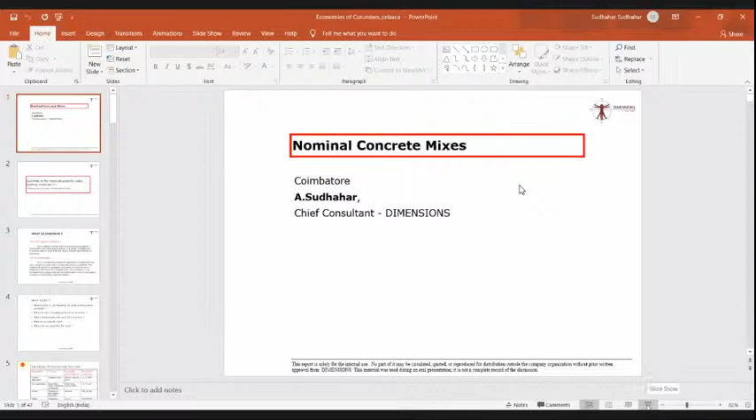I must appreciate your enthusiasm to participate and learn. That should be the spirit of a future civil engineer, to win in this competitive world.

I would like to mention a few words about Dr. Sudhahar. He started his career as a faculty and then shifted to consulting, and later joined ACC Limited, a leading cement manufacturing company in the country. He started as a sales manager and grew to become technical head of the Southern region of India. Then he left ACC and started his own consulting firm named Dimensions. Until date, he is successfully rendering structural engineering and other services. He is also a past secretary of the Association of Consulting Civil Engineers Coimbatore Center.

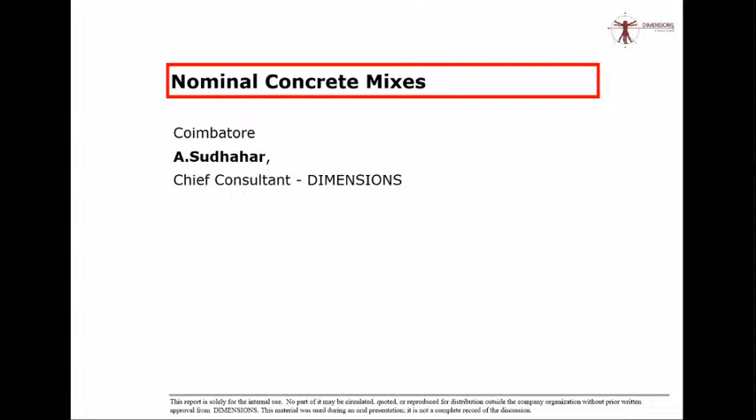And as we see this statement, we should also be looking at it through the perspective that tomorrow's concrete is mostly to be used volume-wise. It is to be used in housing projects, which would normally use M20 grade and below. So to understand nominal mixes becomes very, very vital.

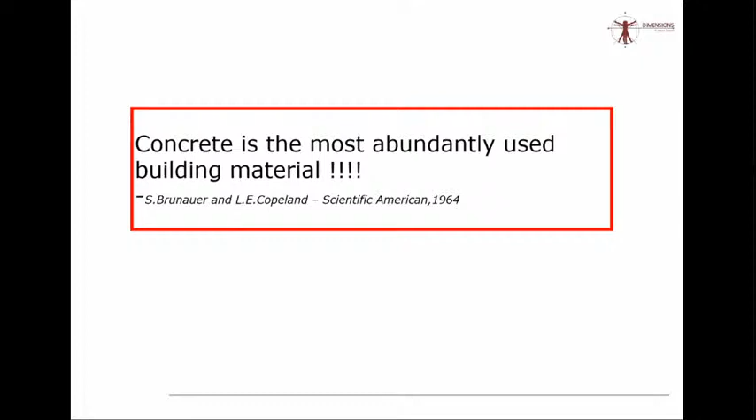Coming to the definitions, I have two definitions here on what is concrete. Most of you would have an academic definition, probably if you have already taken the course on concrete technology. They would describe concrete as a mixture of binder, fine aggregate, coarse aggregate with water. For an actual definition, I would say it is a building material which is generally strong against compression and weak against tension. It is plastic, workable, and moldable when in a fresh state, and it attains strength and stiffness on hardening.

So this definition is more or less giving you a picture of why concrete is being used, because it is very, very strong in compression. It is moldable into any form. It is more durable than most of the other building materials. So concrete is a very popular building material.

To us, which could probably be you or me, it is a homogeneous mixture of aggregates. Here comes your academic definition: it is a homogeneous mixture of coarse and fine aggregates, with a binder and water. It may or may not have additives, but nowadays almost all concretes involve the usage of some admixture or additive, because we expect more out of concrete.

And the quantity of the ingredients are based on the requirements of the behavior of fresh concrete and the hardened concrete, which means what I would use and how much I would use depends on how I will use it and for what purpose, or the engineering requirement of the concrete in a hardened state, namely the strength part, the control on crack width, etc.

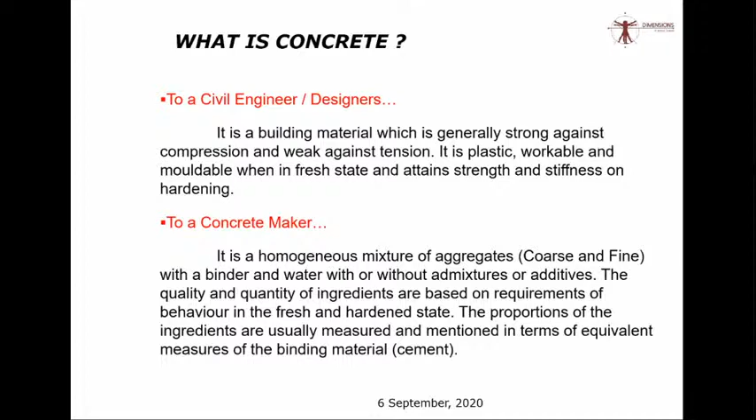So today we also have to look at a very important perspective of concrete, which is cost. Our books don't talk much about cost, but in a practical sense, not only concrete but any building material, any engineering material for that matter, qualifies to be used basically because it satisfies the engineering parameters in terms of strength. Strength can be in terms of compressive strength, tensile strength, abrasion resistance, impact resistance, tenacity, ductility, etc.

So it is all about the engineering parameters. One side is the strength. The second major factor for any material, not just concrete, is the availability, the ease with which one can avail that material and use it to form a product. Third would be formability or usability - how easy is the material, and most importantly, at what cost? Because today's market is all based on cost.

Like any product that is developed and sold in the market at some cost, if this cost is feasible, if this feasibility is defined properly, then the product comes into use. For example, you get a concrete which is highly durable - say somebody claims it will not even crack for 200 years. We are all happy. It is highly strong, you are happy. But if it costs you a bomb, if they say per cubic meter I would charge you 1 crore...

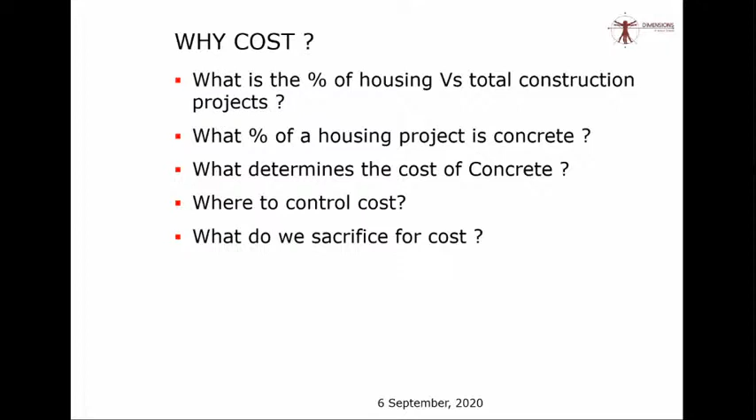So we should not compromise on quality for cost, though cost is of course important. Now, this table gives you the various possible ingredients in concrete, starting from coarse aggregate, which is the major part of concrete in terms of volume. Then comes fine aggregate - these two are bound together by a binder, cement being the most popular binder nowadays, though there are other forms like lime concrete or bituminous concrete. So there can be any form of binder. It has water - when cement or lime is used, we use water; for bituminous concrete, admixtures are used. Each of these ingredients has its own function in the concrete matrix.

Namely, the coarse aggregate is the primary filler - it offers density and the majority of the dead weight required for concrete. Fine aggregate fills the voids between the coarse aggregate, therefore it's called the secondary filler. It also influences workability - that doesn't mean coarse aggregate won't influence workability, I'll touch upon this point shortly. So coarse aggregate and fine aggregate combinedly influence workability with respect to their shape, particle size distribution, texture, etc.

Then comes the binder. The primary job of a binder is like a glue - it binds together all the particles of the concrete. It also ensures durability, blocking the finer pores or voids within the fine aggregate or the whole matrix. The density of this blockage determines the durability to a great extent.

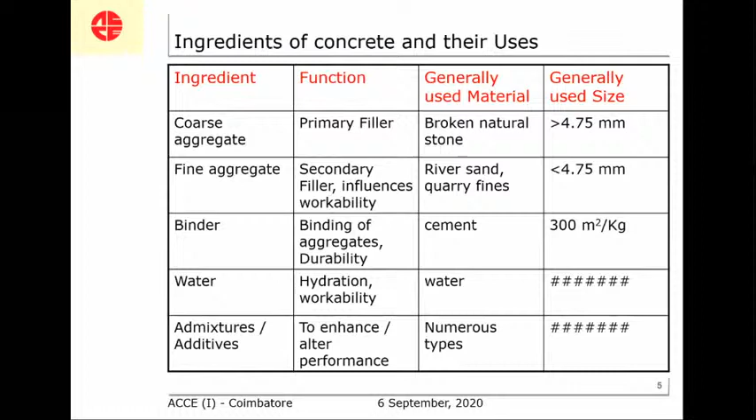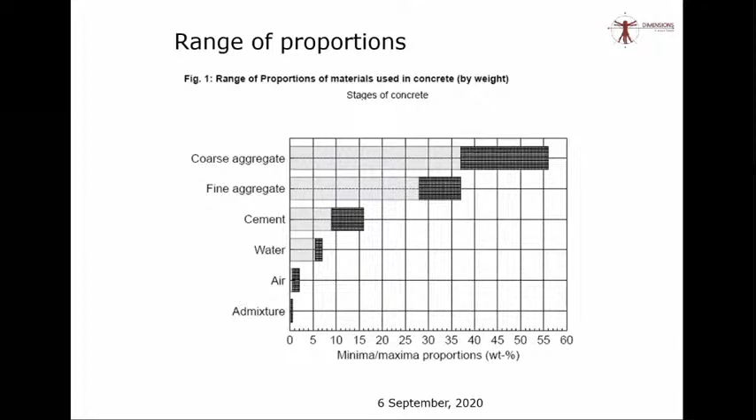Then water to cement is always in the range of 0.5 to 0.55 - almost 50% of water would be required based on the quantity of cement you use. You should also appreciate that there is some air content. You cannot make a zero air content concrete - at least till now nobody has produced it. You have various degrees of admixtures, but their influence on the rheology is going to be great.

Okay, coming to the performance of concrete, we have to view concrete in three different stages. One is the fresh stage, the other is the hardened stage - these two are very popular. Transition stage is one stage which as a student you may not have had a very good experience with, or may not have interacted with concrete in a transition stage.

In the first stage, we all would have done the slump cone test, so you know how fresh concrete looks like and how to do the slump cone test, where the most important parameter viewed for concrete is the workability. In the hardened stage, the most important parameter is mostly the compressive strength. In some special structures, we also look at the tensile strength of concrete, the crack pattern, the crack width, etc. But coming to this transition stage, what is this transition stage?

It is a stage in which the initial setting of concrete is over, but it has not attained the final strength, or it has just started the process of attaining final strength. So initial set is over, hardening has just started. This is the stage called transition, sometimes called young concrete, or colloquially, this is the stage where concreting is done, finishing is done, and it is just time for you to start curing the concrete. It is the time just before curing. This is called a transition stage.

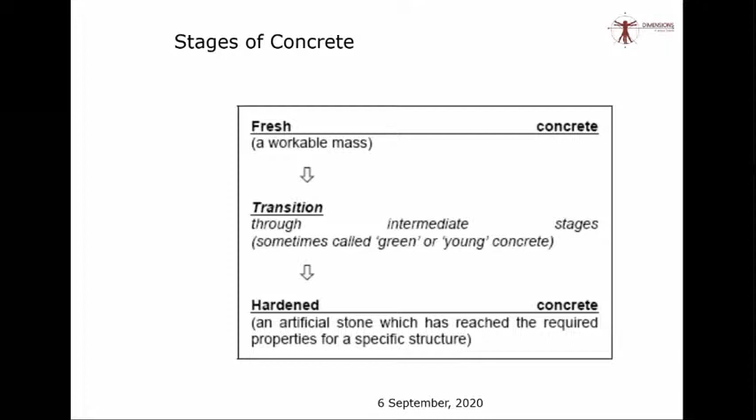This stage is very important for you to engineer, to supervise, to take care of, because this stage will ensure the right performance of concrete. It will also ensure a longer durability for the concrete.

How do we understand concrete? We were discussing this just a short time before. How do we understand this concrete? It is workability, strength, and durability, but the most popular parameter is strength. We only talk about grade of concrete. We are aware of workability, but the awareness dies after the concrete pouring is done. Though workability is a very significant indicator of the final performance of concrete also.

For those of you who would go to sites and would be using this concrete, remember, workability is an indicator. If you have very high workability, you should start thinking more about what is happening inside this concrete. If you have very low workability, you should start thinking. So workability, though it is a parameter that you assess once you place the concrete, vibrate it and finish it, is an indicator of what has gone inside the concrete. And you can almost predict what will happen to the concrete after it is hardened completely.

Then comes the strength. The predominantly used strength parameter is the compressive strength. There are research topics, applications, and tender documents which also emphasize the requirements of tensile strength. But concrete, we know, is primarily used to the advantage of its compressive strength.

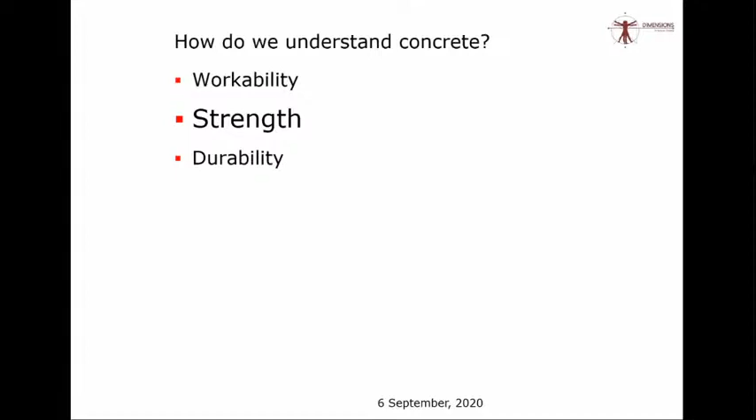There are tests which will tell you the level of durability. It will not give you an absolute value. Tests like permeability test, chloride penetration test, sorptivity test—all these are tests for durability of concrete, but they will only give you a relative value of the durability performance. It will not give you an absolute value of durability in terms of timelines.

Now come to the strength. We usually classify concrete in terms of grade of concrete, starting basically from M5, M7.5, M10, etc. This grade is called the characteristic strength of concrete. If you search your code book for the definition of characteristic strength, your IS 456 will state that it is the strength of a material below which not more than 5% of the test results are expected to fall.

Which means if the strength is 95% okay, then it can be assigned that strength. To be very precise, if you test 100 samples of a particular material—it can be concrete or anything else—and out of those 100 samples, if 95 and above pertain to a value and above—see, for example, in concrete, if 95 cubes of samples out of 100 cubes which you take exhibit strength of 30 MPa and more, then you can grade that M30 concrete, which means 5 cubes can be below 30 also. So it is only 5% tolerance which the code book is giving.

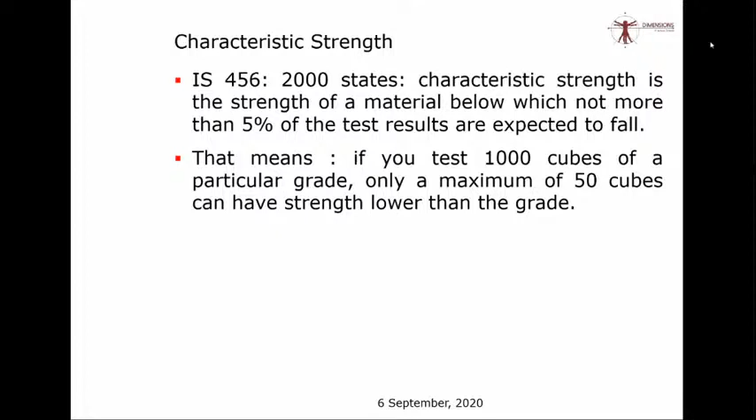That is why the earlier tests, not the grade test but the other tests done on concrete, are all in forms of 7 days. You either test it on the 7th day, 14th day, 21st day, or the 28th day. So if you are casting something on a Monday, remember you will test it on the next Monday, the next Monday, the next Monday, or finally the 4th Monday, which is the 28th day, and that will give you the concrete grade itself. That is it with the characteristic strength.

Now coming to the ingredients one by one. Basically, there are two popular forms of binders available in cement itself. One is ordinary Portland cement, and the other is blended cement. Out of the blended cements, the most popular one is Portland Pozzolana cement. The second popular form is PSC, Portland slag cement.

Now, what happens when OPC combines with water? It forms something called calcium silicate hydrate gel, CSH gel, and it also forms lime, calcium hydroxide. This calcium hydroxide is very much essential for the concrete because it ensures that the concrete stays alkaline. It also plays a vital role in blocking the finer pores of the concrete matrix.

But what happens if you use more water cement ratio? This calcium hydroxide gets washed away or carried out of the concrete matrix while you cure the concrete, and that is why you would have noticed some white efflorescence or white substance coming out of concrete when you start curing it. This is nothing but the calcium hydroxide washed away due to the excess water cement ratio used during the preparation of the concrete.

But this problem is mitigated to a certain extent when you use blended cements, because part of this calcium hydroxide, not entirely, is reutilized by silica available in the form of mineral admixtures, basically the pozzolana materials, the fly ash or the slag. So part of this lime is again combined with silica, and it again forms a small quantity of calcium silicate hydrate. This is why blended cements are more durable, as well as give a little extra strength in the long term, because of the secondary hydration which takes place.

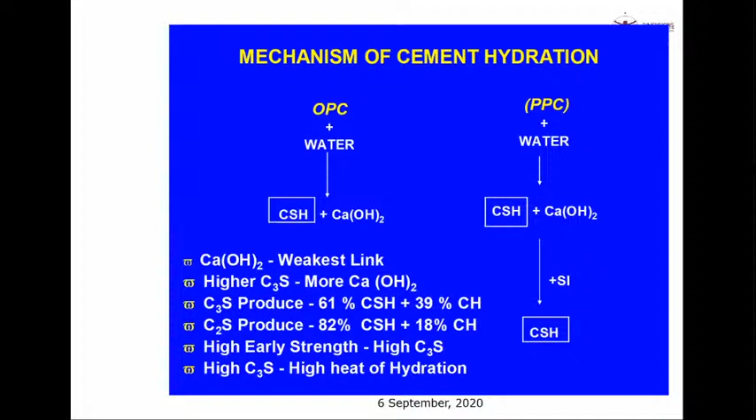These are the Bogue compounds basically available inside cement: C3A, C3S, C4AF, and C2S. I would not dwell more into this because we are going to talk more about the proportioning rather than the quality control of the concrete itself.

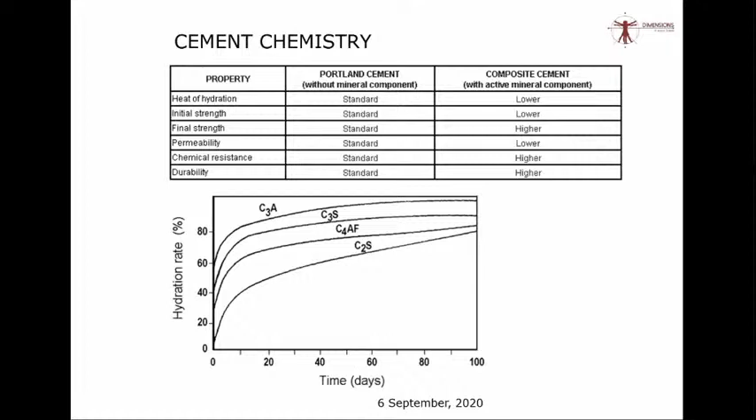But what you can understand from this is all these four compounds do not behave in a similar manner. They have a sequence of reactions. They have their different intensity of reactions, and they produce different kinds of effects while they react. So each of these Bogue compounds has a specific role to play in the hydration process. That is what you need to understand.

So I hope we have dwelt enough on grade. We just saw what is the characteristic strength, workability - the easiness with which you can transport, place, and mold the concrete, which is popularly understood by the slump cone test. There are other tests for workability also, you might be knowing. And durability is an indicative estimation of the service life of the concrete structure, but it is a highly complex thing to derive exactly. You cannot do that. It's almost impossible because it's a function of various other parameters such as exposure conditions, etc. Coming to exposure conditions, your IS 456 gives you a lot of classification on the exposure conditions. I'll show that table also now.

Water cement ratio, we understood what is Abrams' law. One basic moral which we should never forget is higher water cement ratio means lower strength and lower durability.

Curing is an important process in which you ensure that the water cement ratio which you have added during the preparation of concrete is very effective. Which means curing is not a process of adding more water. Curing is some technology. It need not even involve water. You can do curing without water also. So there are curing compounds, which is basically the protection of the water cement ratio, ensuring that the water cement ratio what you have added is fully utilized by the cement for its hydration. So that is the process of curing.

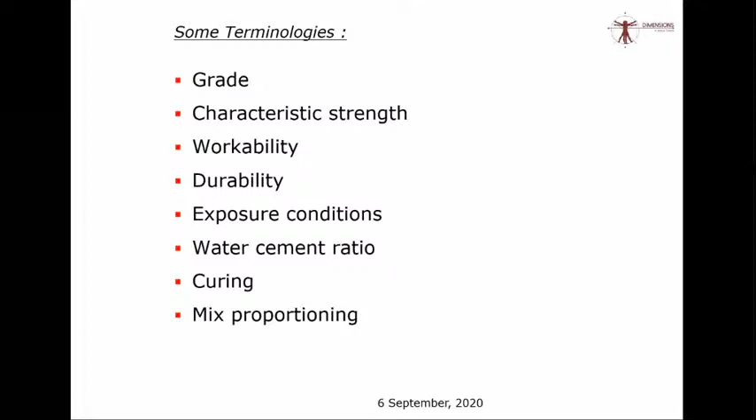And finally, we will come to mix proportioning, which is the basic language which your concrete maker will understand. You cannot go and talk to him and say I need a concrete with 60 mm slump or 75 mm slump. All you can tell him is mix 1:2:4 or 1:1.5:3, whatever. You can give some numbers through which he will understand and make the proportion.

Now, IS 456 classifies concrete into three categories. One is ordinary concrete, which is up to M20 grade. They have not put lean concrete here. Anything below M10, we classify it as lean concrete. So ordinary concrete, standard concrete, and high strength concrete. Standard is M25 to M55, and from M60 above, it is called high strength concrete. Remember, today's topic, nominal mix, is only applicable for ordinary concrete.

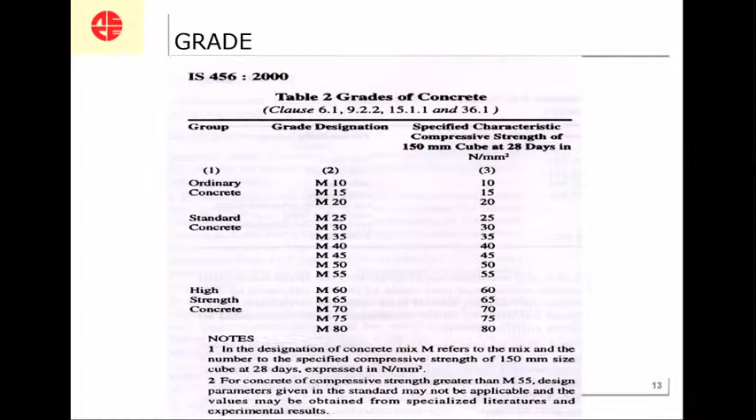These are the workability conditions, but this I would say is more or less very theoretical in nature. See, 75 to 100, for example, indicates a medium degree of workability, but sometimes on sites you will understand that 100 mm slump even causes segregation. It is highly workable, sometimes flowable also when you vibrate it. So it is all relative, all indicative. You will understand the meaning of it when you actually experience yourself with concrete. You touch concrete, you supervise concrete. The more and more you are with concrete, you will understand these numbers in a different perspective.

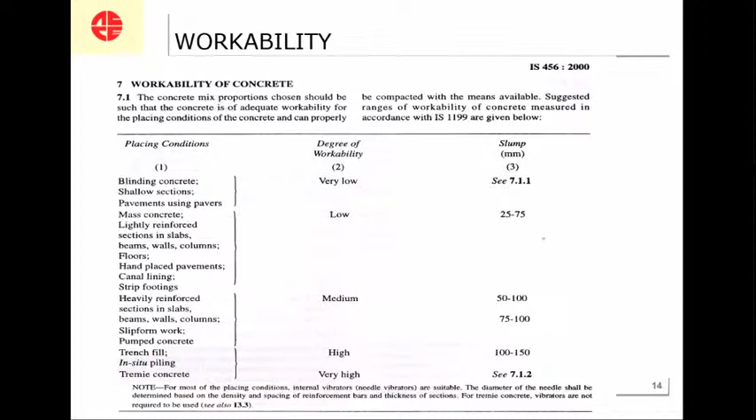Workability of concrete - I was just talking about the influence of the aggregates on the workability of concrete. In this picture, you can see two diametrically opposite forms of coarse aggregate. One is sharp and angular, the other is rounded and smooth. Common sense would say that if it is round and smooth, you will get more workability. But then what will happen is you will not have enough adherence, not enough bonding between particle to particle. So you cannot completely use smooth aggregates.

You cannot use pebbles completely as aggregates unless you have modified your mix proportion to suit that. What we have to understand is we have to find a balance between the shape, angularity, and sharpness. You cannot have very flaky or long elongated kinds of aggregates, because that will hinder your workability to a great extent, and it will force your concrete maker to add more water, and therefore you will lose the advantage of strength and durability.

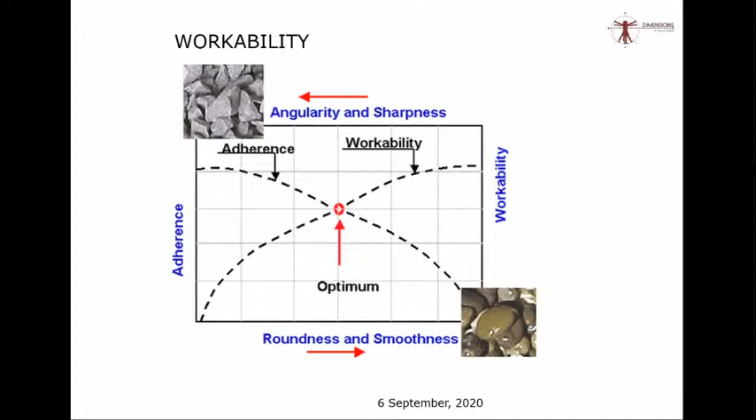Durability, I told you, is complex. It is dependent on the environment in which your concrete structure or element is going to be placed, and the cover given to the embedded steel.

The durability of concrete does not have threat only from outside, it has a threat from inside also. If the reinforcement inside is not of good quality, or if it starts corroding and swelling, then the durability of your concrete is gone. The reinforcement is protected by properly giving proper cover thickness.

Therefore, the kind of tolerance you maintain while giving cover thickness is important. The quality of concrete in the cover is also very important. I've seen many sites where the cover thickness is okay, but the cover concrete is all honeycomb, not having the cover thickness at all.

So the quality of cover concrete, the actual cover given, the type and quality of the constituent materials, the ratio used, the workmanship, the efficiency of curing, and the shape and size of your member are also very key parameters.

Any postgraduate student here would appreciate the phenomenon of stress concentration in sections. Basically, if it is an overstressed area in concrete, it is susceptible to deteriorate fast. Anything which is stressed higher will deteriorate fast.

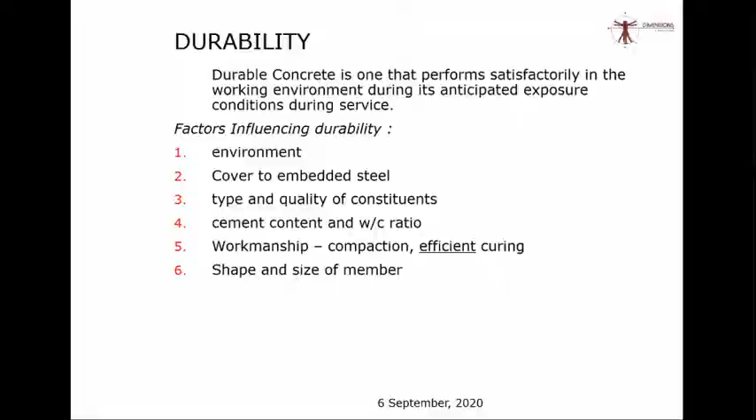The durability comes down. Therefore, the shape of this member matters - if you have rounded corners, you will not have stress concentration, which itself is an advantage for maintaining durability. So the shape, size, and stress concentration in the member also play a vital role in the durability of concrete.

These are the exposure conditions. Our IS code has classified exposure conditions into 5 categories: mild, moderate, severe, very severe, and extreme. The mild exposure condition describes concrete surfaces protected against weather or aggressive conditions, except those situated in coastal areas.

But in today's urban world, I don't practically see a mild exposure condition, because in cities you have a lot of threat of carbonation, even though you are away from an industrial zone. The kind of carbon dioxide exhaust from vehicles itself is a threat for you.

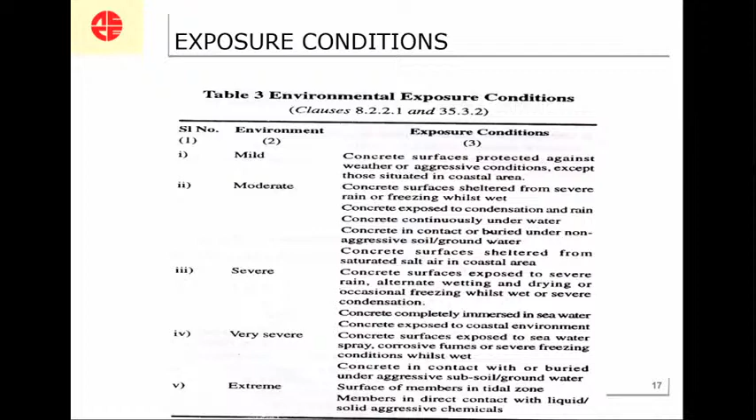So my personal advice would be to design concretes at least for moderate environmental exposure conditions, because there are claims that the rains we get nowadays are acid rains, acidic because of pollution in the environment. Therefore, it is safer to design concretes at least to the moderate exposure condition, if not mild. Unless you are very sure you have mild environmental condition, I think you should choose moderate.

This is table number 5 of IS 456, which tells you one very important parameter. If you are using plain concrete, the minimum cement content you should use in kilograms per cubic meter of concrete: for mild exposure conditions it is 220 kilograms, and for moderate it is 240.

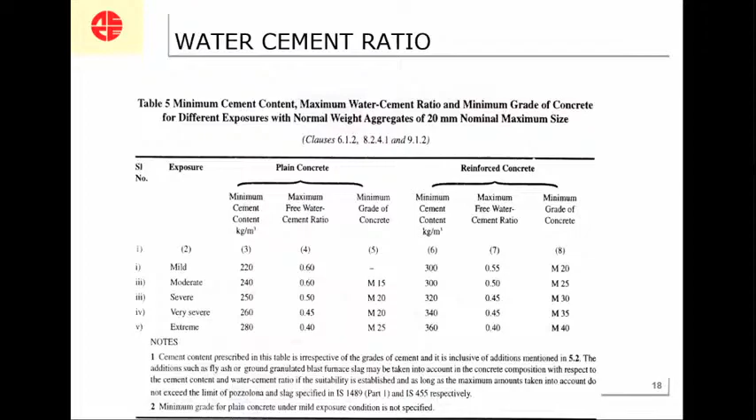But today we are going to talk more on structural concrete, not plain concrete. So there is enough and more probability that you will land up in a much higher strength. The nominal mix is only a guarantee of the minimum strength you will attain. So M20 adopted through this nominal mix table in IS 456 need not always be M20 - it can sometimes be M30, or I have experienced M35 also in some cases.

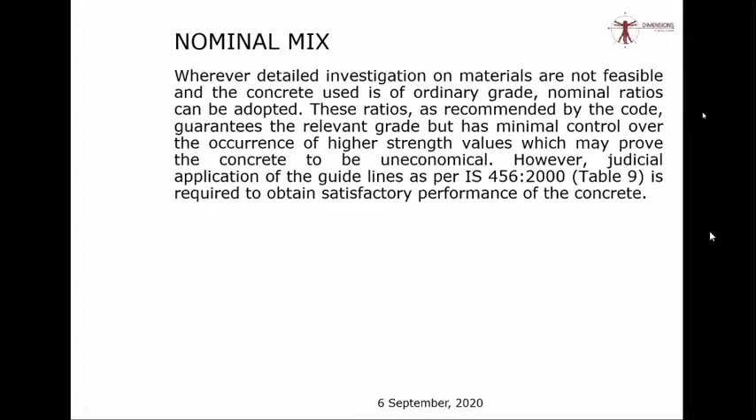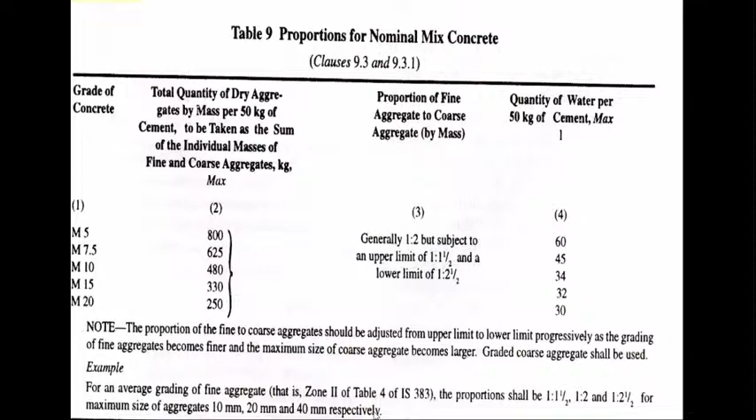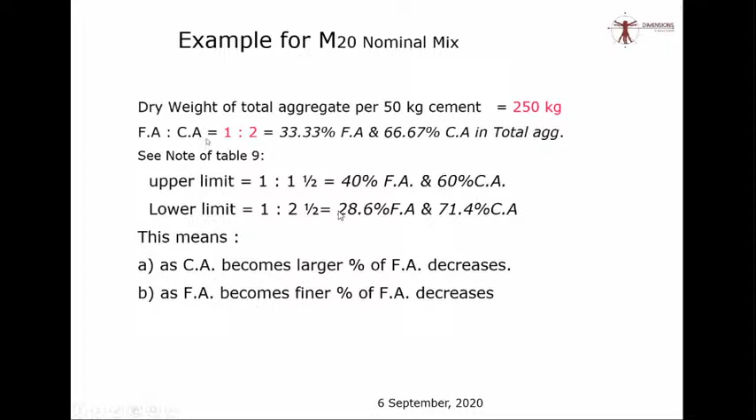So both put together, 83.33 plus 166.67 is 250 kg. So 50 kg of cement I have taken, 83.33 kg of fine aggregate, and 166.67 kg of coarse aggregate. So the actual ratio recommended by IS 456 is 50 is to 83.33 is to 166.67 kg. If you divide all these values by 50 to make it a simpler ratio, it becomes 1:1.67:3.33. So this is the actual nominal mix ratio by weight as recommended by IS 456. It is not 1:1.5:3.

Now, if you compare this with 1:1.5:3, you will find this is a little bit leaner mix. The amount of cement saved here is quite high. If you use 1:1.5:3, you would probably use up to 50 to 60 kg of cement extra per cubic meter of concrete. Those of you who have interacted with site engineers would have got this feedback that for M20 concrete, we roughly use 420 to 425 kg of cement per cubic meter, whereas the minimum requirement is only 300 kg. So these points are to be noted here. All these proportions mentioned by IS 456 are by mass.

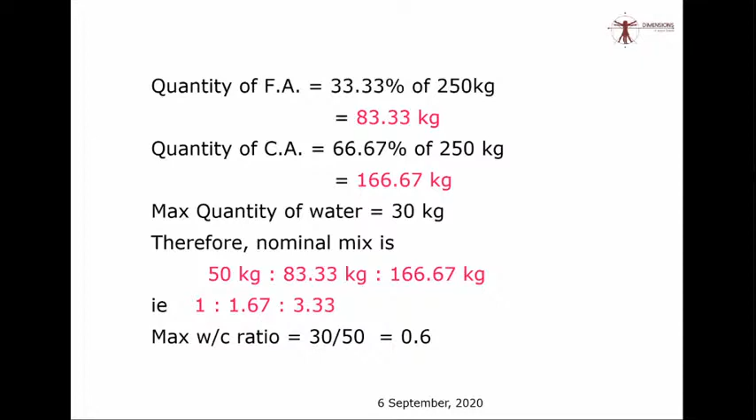Now, how to find that? Today, it is very simple. You have infrared moisture meters. You can use an electric oven, not the conventional convection oven. What you have, you can use a microwave oven, which will evaporate the water very quickly. So it is very easy for you to find the moisture content of the aggregates at site.

So accordingly, you will have to do modifications of the mix proportions, for which I am giving you another example. In case you don't have the facility to exactly measure the moisture content, then IS 456 gives you another way, which is not so accurate, but at least it will be a guideline. It says very wet sand will have 7.5% moisture. This is in table 10 of IS 456. It also says moderately wet sand will have 5% moisture. Moist sand will have 2.5% moisture. Crushed rock or moist gravel will have 1.25 to 2.5% of moisture.

My experience says for 2% of moisture, you have to be very careful. You should know whether the sand is very wet, moderately wet, or moist. Now, how to find this out? That is through experience. I will give you a simple trick to gain this experience.

Go to your labs, take absolutely dry sand. You purposefully add 7.5% moisture to it, mix it, and try to have a feel of how the sand feels when you take a lump of sand in your hand. By doing this, you will have an experience of 7.5% moisture, which is very wet sand.

Then you can do the same exercise for moderately wet sand by adding 5% to absolutely dry sand. Moist sand, you can do it with 2.5%. You can have all 3 samples in front of you, sample them multiple times, then you will be able to judge it. This has to be there if you want to avoid using an infrared moisture meter or microwave oven at your site. So this will come only through experience, or you have to bypass this and resort to scientific methods in which you will find the percentage moisture content.

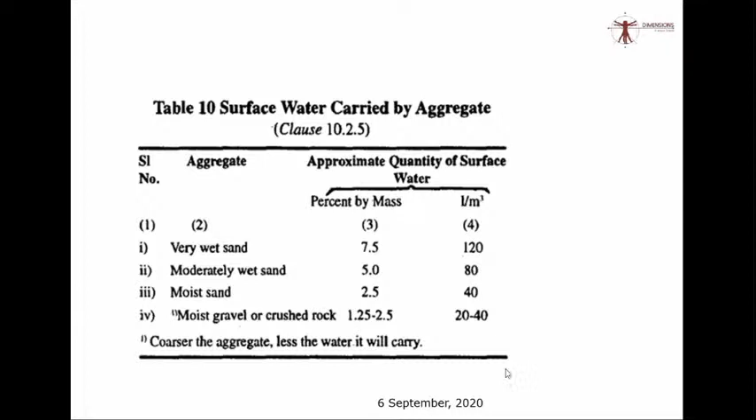Now, to understand this better, I have assumed a moisture content of 7.5%, which is mostly the case when you get fresh sand either from the riverbed or even from an M sand manufacturer. Mostly it is having 7.5% moisture, and I assume a 2.5% moisture for coarse aggregate.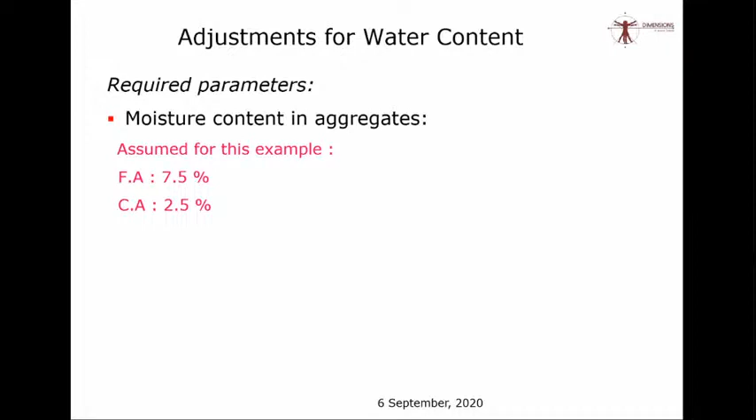And now, what is the correction I have to do? Instead of 83.33 kg, I will take 89.58 kg of sand. I arrive at this because I have got 7.5%. So I divide 7.5 by 100, which is 0.075. I add it with number 1, so it is 1.075. I multiply this 1.075 with the initial value, 83.33.

So if I had assumed 5% moisture in fine aggregate, I would have multiplied 83.33 by 1.05. If I have assumed 2.5%, I will multiply it by 1.025. I hope now you understood what I am trying to say.

So based on the percentage of moisture, either assumed or derived from scientific methods like an infrared moisture meter, if for example you have got 4.5% moisture using a moisture meter and checking it, you will have to multiply 83.33 into 1.045. I got 0.045 by dividing 4.5 by 100. So you will get 89.5 kg of fine aggregate when you have assumed 7.5% moisture.

Similarly for coarse aggregate, you will do the same exercise. For the initial value of 166.67, you will have to multiply 166.67 by 1.025, so you will land up with 170.84 kg. Now your new ratio would be 50 kg of cement. Instead of 83.33, you will multiply it by 1.075. So your weight of fine aggregate is 89.58, and your weight of coarse aggregate is 170.84.

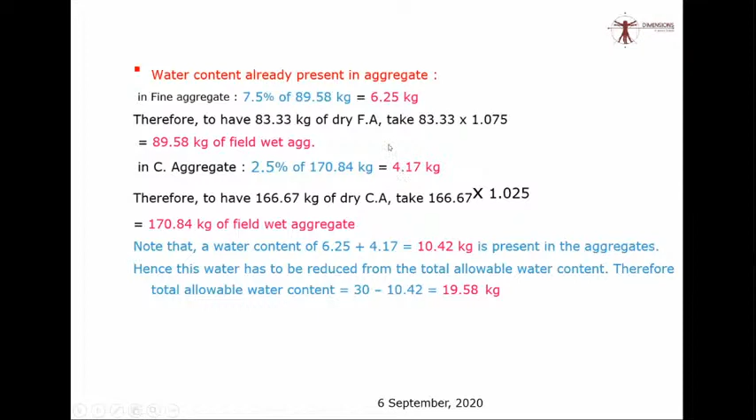Therefore, you will have to reduce the 10.42 kg from your 30 kg, which is allowed. So your maximum moisture content water cement ratio will become 19.58, which is a result of 30 minus 10.42, divided by 50. 50 is nothing but the quantity of cement you are using. So water by cement, your water cement ratio is now 0.39.

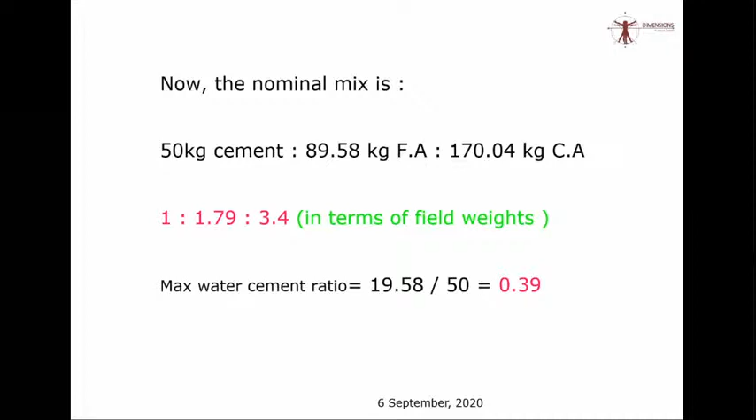So 1 is to 1.79 is to 3.4 with a water cement ratio of 0.39 will be your actual nominal mix what you will be adopting, rather than your 1 is to 1.5 is to 3 what you would normally believe. So roughly you will at least save 50 to 60 kg of cement per m cube of concrete.

So imagine how many m cube of concrete you would use in your lifetime or a 10-year period, and for each being able to save 50 kg at least, you have done a lot of good to yourself as well as to the environment, because every kg of cement you save, you don't waste. It means actually you have saved 1 kg of carbon dioxide being pumped into the atmosphere.

So environmentally also it is good that you don't waste cement. Economically also it is good that you don't waste cement or use extra cement, because you are actually burying the profit, your profit or your client's profit, inside concrete. So you will not do that.

When cement exceeds a particular limit, a little bit of extra cement is no harm. But if you keep on adding more and more cement just to achieve more quality, actually it will deteriorate the quality, because cement is a highly shrinkable material. It will form shrinkage cracks very rampantly, and therefore you will end up losing strength and durability.

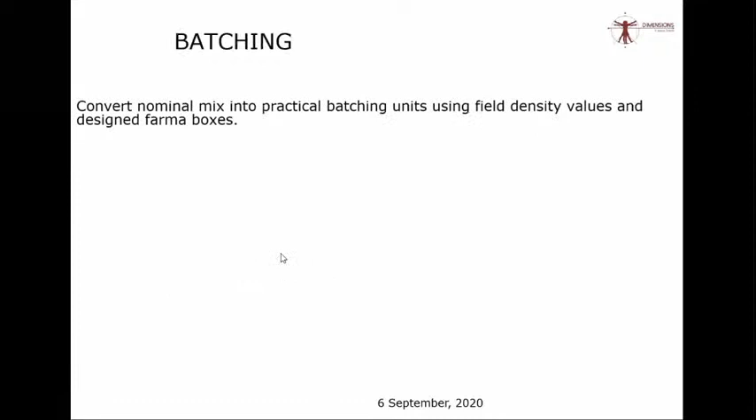So once you have arrived at this proportion, you should use proper batching techniques. Either you can convert this weigh batching into volume batching by suitably designing farma boxes. This is a farma box. You can design a farma box or use a standard farma box.

Fill the aggregates in volume. Know the actual field density of the aggregates, and therefore it will be easy for you to convert these numbers in mass to volume, for which it is a simple fundamental of knowing the field density of aggregates.

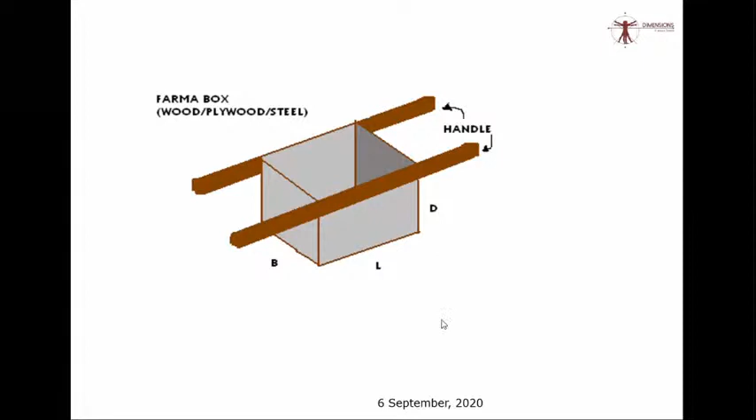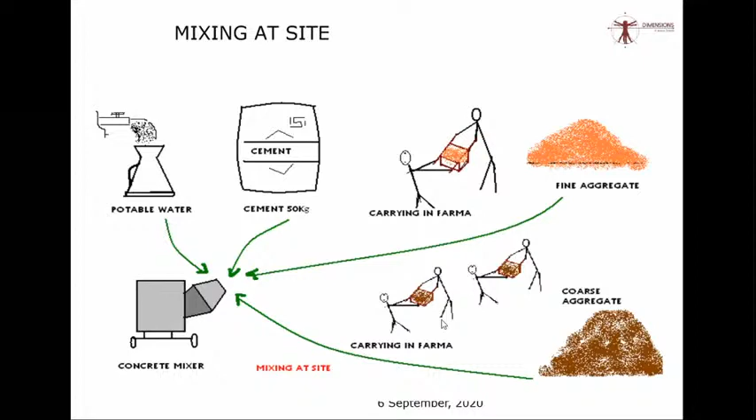With that, use very good quality of water. Ideally it should be potable water. Use proper batching techniques, and then you will get very, very good results in terms of your concrete quality. Again, I'm telling you, the performance of your concrete depends on how you handle it, how you take care of it during the transition phase, and how you would maintain it during the hardened phase.

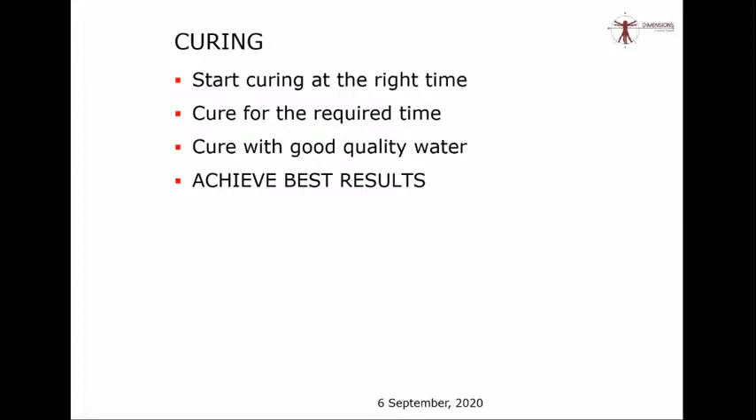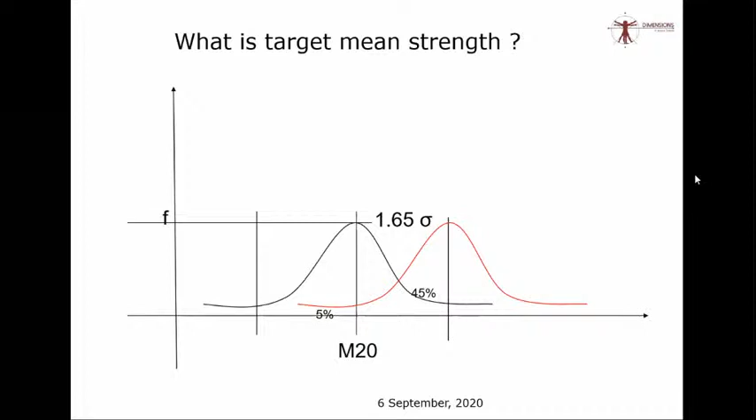So this is all about nominal mixes. I have more on the mix design, which will be touched upon in the next session. So I would like to end my session at this point.